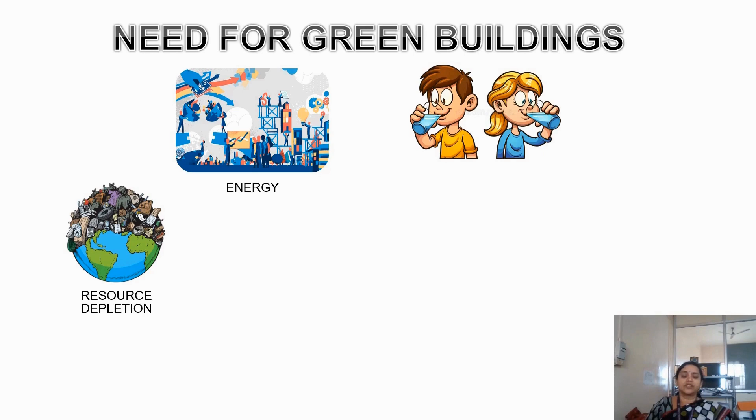Buildings' negative impact on the environment has paved the way for the growth of green buildings or sustainable buildings today. Buildings are responsible for a huge demand for material and resource depletion for construction, and buildings are known to consume a large amount of energy. More than 30 to 40% of energy produced is consumed by buildings around the world, and buildings are responsible for contributing more than 20% of water consumption throughout the world. All of this has led to global climate change.

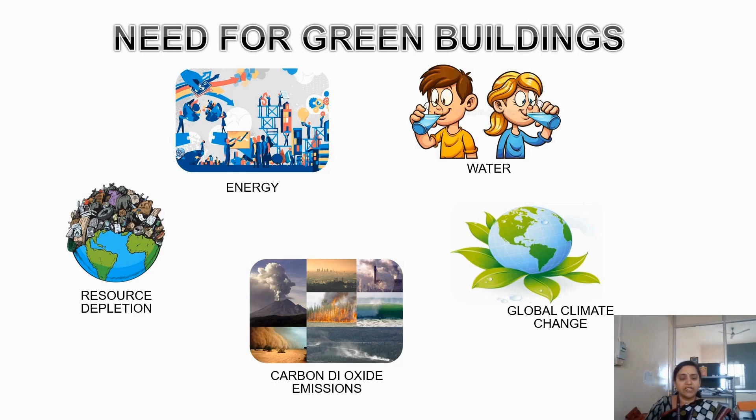So we are now suffering due to the climate crisis, and moreover buildings are responsible for increased carbon dioxide emissions throughout the world. We will have a detailed understanding in this session.

The first major raw material used in building construction is cement. India is the second largest producer of cement in the world, producing more than 210 million tons of cement, which is around 6.3% of global production. Indian cement production is set to increase 4 to 7 times by the year 2050 because of increased demand. But we have to consider that per capita consumption of cement in India is comparatively lower than developed countries, which is around 200 kg per person.

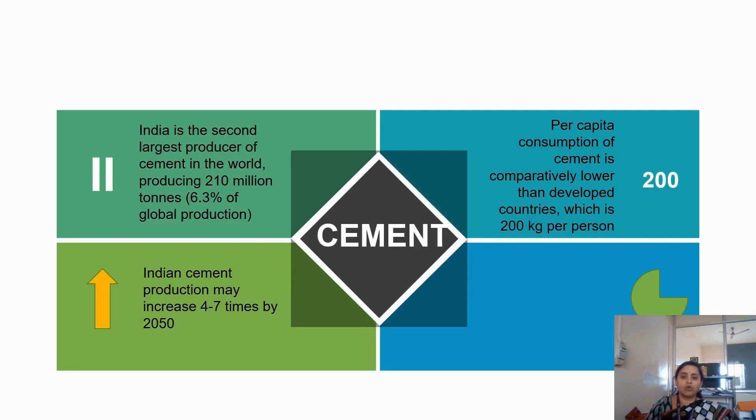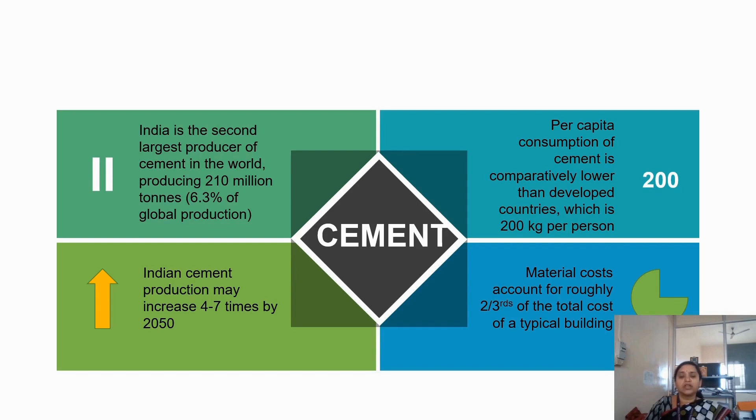Though this is not an excuse for the growing demand and usage of cement. We also should understand that material costs account for roughly two-thirds of the total cost of a typical building, and this is also one of the reasons we have to reduce resource consumption in building construction.

Moreover, cement is also said to cause a huge amount of negative impacts in terms of pollution and other sustainability impacts on the environment.

The next important category of raw material is sand. We all know that since ancient times we have been using river sand, widely used as fine aggregates. Owing to current scarcity, we have now switched over to using manufactured sand in cement mortar as well as in concrete.

Another material highly used in building construction is bricks. Bricks are also used as the base material for roads, as reused or demolished bricks. For the manufacture of bricks, a huge amount of fertile topsoil is being utilized in major parts of the states in India.

Because of recent interventions by the government as well as by professional organizations, and more importantly certain recommendations by the BIS standards, we have now increased the usage of fly ash as a replacement in major raw materials. We know that 12% of total fly ash generated in India is currently used for the production of bricks and tiles. This is an appreciating note, but still we have to understand that owing to the huge demand and usage of raw materials, this percentage is very meager and has to be increased.

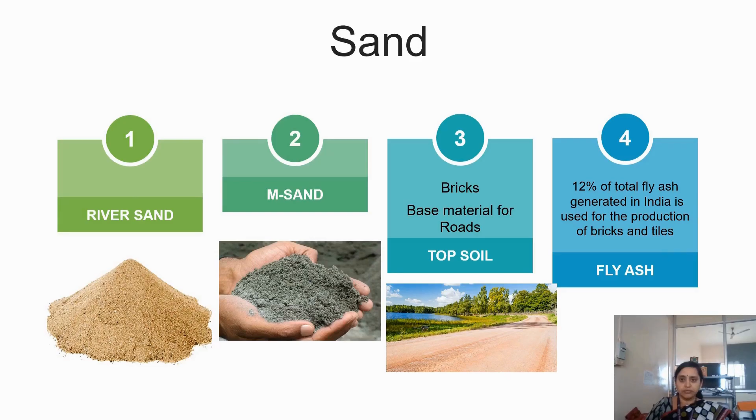The third important material used in large quantity is aggregates. Aggregates have been in use for the manufacture of concrete, in foundations, and so many other applications in the structural built environment. We have used granite, basalt, etc. as aggregates in our building construction.

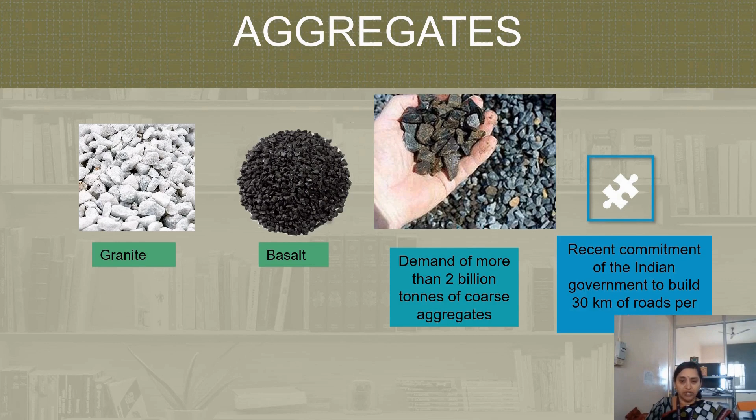Referring to the aggregates, we have a huge demand of more than 2 billion tons of coarse aggregates per year in India. And the recent commitment of the Indian government to build more than 30 kilometers of roads per day adds to the huge demand of aggregates still further.

There is a huge requirement of both fine aggregates and coarse aggregates as well as cement, as per the growth of buildings in India. So we have to check whether all the raw materials are available as per the demand, or else we have to go for a sustainable alternative to search for replacement raw materials.

One more important material to consider is limestone, which is used in the cement manufacturing process. India utilizes about 226 million tons of limestone in cement manufacture as well as in iron and steel, chemical and other industries, out of which the cement industry's share is about 93%. Research reports denote that limestone resources in India will last only for the next 35 to 41 years. So after 40 or 50 years, we won't have the material called limestone.

So we have to really pay attention to this and search for a good replacement for limestone, especially for cement manufacture. One more thing to understand is limestone also causes huge negative impacts in terms of pollution during the process of quarrying. So replacement of limestone will be a very good alternative to satisfy future requirements as well.

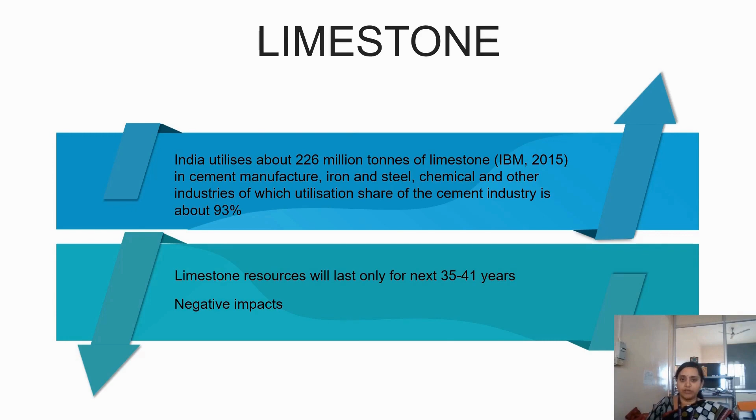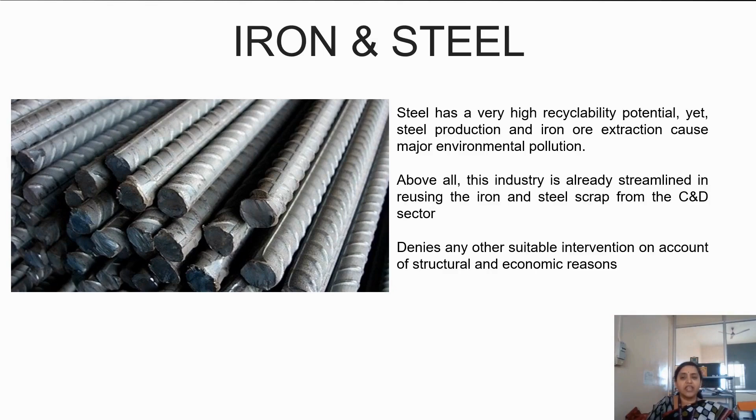We have discussed major materials. One important sector to consider is the iron and steel industry. Steel has very high recyclability potential and has been used extensively in the built environment. But thanks to the Indian economy, with the help of rag pickers or scrap vendors, even minute quantities of steel scrap are recycled back into the industry, so there is no major problem of iron and steel as waste in the Indian economy. Because of this, the iron and steel sector denies any other suitable intervention on account of structural and economic reasons. So as of now, usage of iron and steel is appreciated and not under any intervention in the green building scenario.

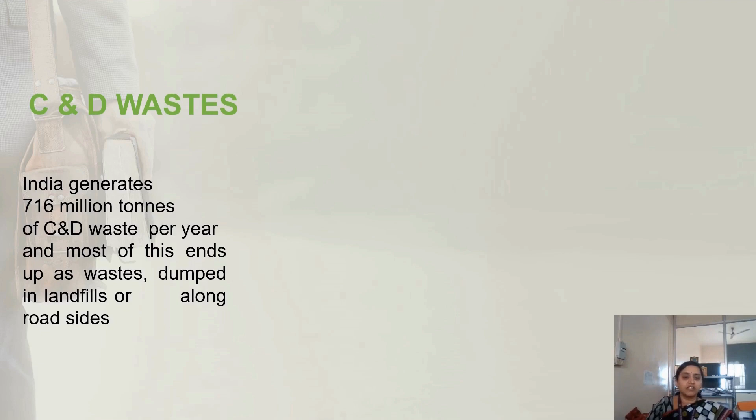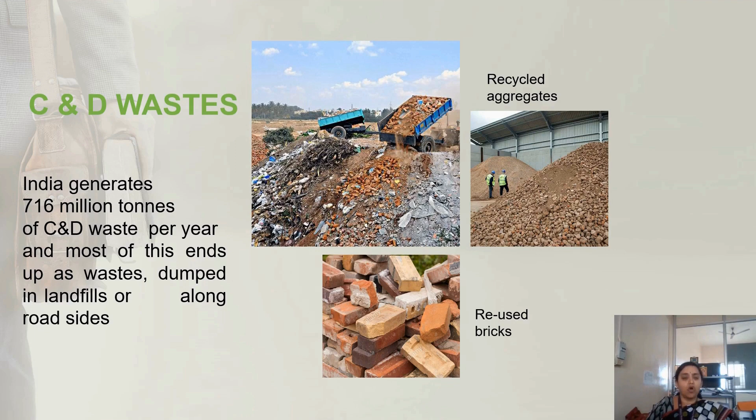The next important category to consider is construction and demolition waste. India generates around 716 million tons of construction and demolition waste per year, and most of this waste ends up simply dumped in landfills or along roadsides. This waste has huge applicability potential as recycled aggregates, and the construction and demolition industry should also take steps to use reused bricks in major construction activities today, so as to minimize the huge amount of waste being simply dumped in landfills. This will also lead to savings in the usage of raw materials.

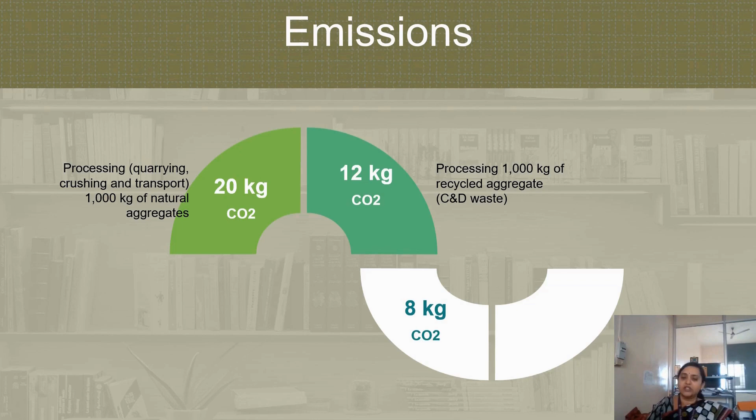There is an interesting fact to understand regarding emissions. Research mentions that processing 1000 kg of natural aggregates - quarrying, crushing and transport - emits around 20 kg of CO2 into the atmosphere, whereas the same processing of 1000 kg of recycled aggregates, produced from construction and demolition waste, produces only 12 kg of carbon dioxide. Comparing these two, we understand that material replacement with 1000 kg of recycled aggregates from construction and demolition waste will prevent emission of 8 kg of carbon dioxide into the atmosphere.

Thus, simple replacement with recycled aggregates rather than natural aggregates can cause savings of around 8 kg of CO2 per 1000 kilograms of aggregates. This will really cause huge savings and improvements in carbon dioxide mitigative measures, and if we employ such activities, we can save around 8 million tons of carbon dioxide per annum compared to the huge usage of materials in the Indian scenario. Also, the aggregate demand in concrete and road laying in India is estimated to be 1.1 billion tons per annum.

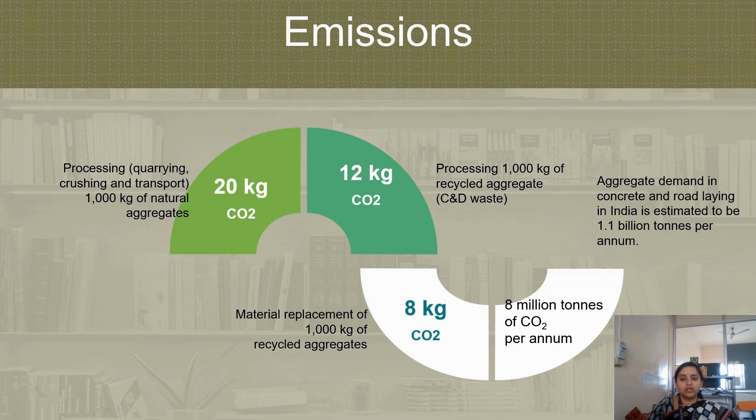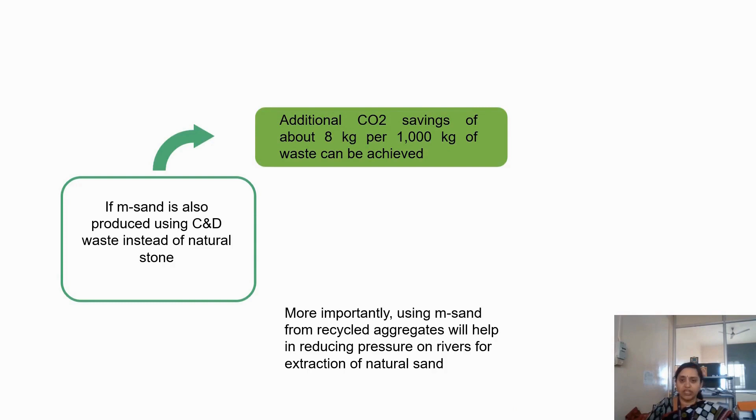So if we are going to replace huge demand with recycled aggregates from construction demolition waste, it will cause a huge impact on the minimization of carbon dioxide emissions to the environment. In addition, if M sand is also produced using construction and demolition waste instead of natural stone, additional carbon dioxide savings of about 8 kg per 1000 kg of waste can be achieved. More importantly, using M sand from recycled aggregates will help reduce pressure on rivers for extraction of natural sand.

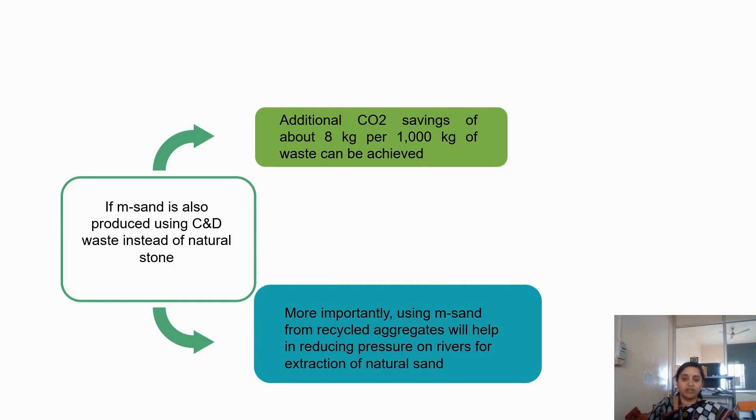We had an understanding about the impacts of material usage in the construction industry. Now we'll understand the impacts in terms of energy conservation.

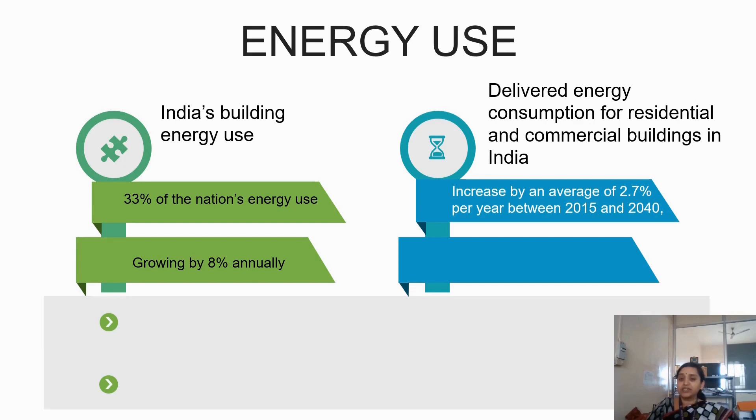Buildings also consume a large amount of energy. Considering India's building energy use, 33% of the nation's energy use corresponds to buildings alone, and this demand is growing by 8% annually, causing a huge requirement of energy consumption. When we speak about delivered energy consumption for residential and commercial buildings in India, this increases by an average of 2.7% per year between 2015 and 2040, and this demand is more than twice the global average. Summing up, building construction and usage demands a large amount of energy compared to all other sectors, and this really needs an intervention measure.

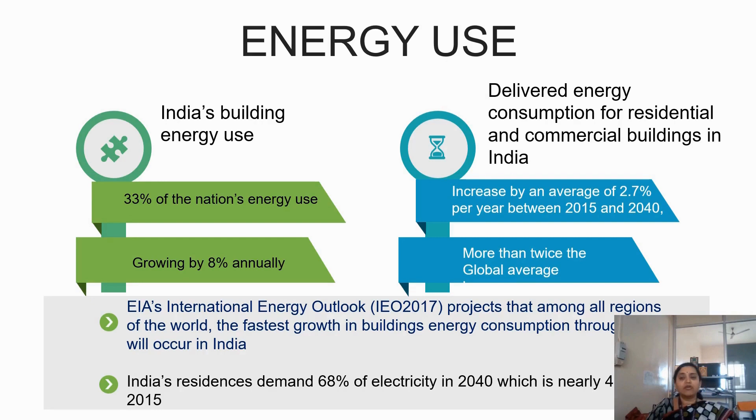EIA's International Energy Outlook also projects that among all the regions of the world, the fastest growth in buildings energy consumption will occur only in India, and India's residences demand more than 68% of electricity in 2040, which is nearly 4 times the average in 2015. Considering this, we have a potential to grow green buildings in such a way that energy consumption should be minimized in India.

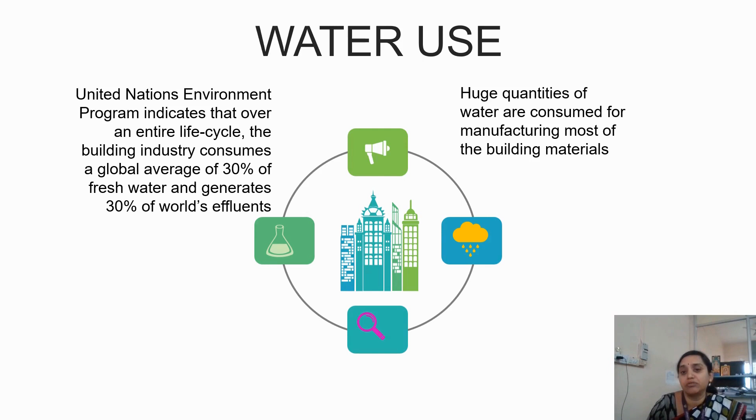Another broad sector is water consumption in buildings. The United Nations Environment Programme indicates that over an entire life cycle, the building industry consumes a global average of 30% of fresh water and generates 30% of the world's effluents. Huge quantities of water are consumed for manufacturing most building materials, adding to the water demand. Building construction is one sector which consumes a substantially high amount of water every year, and the rate of extraction of water far supersedes the rate of replenishment.

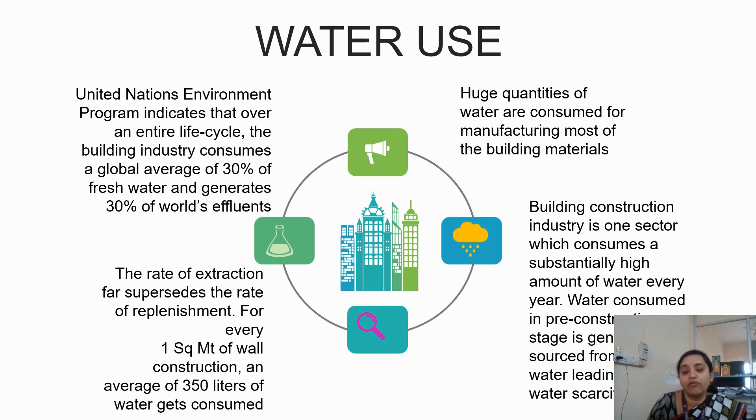For every square meter of wall construction, an average of 350 liters of water gets consumed. Overall, we have a huge consumption of water, more than 20% of the world's water demand, only for building construction.

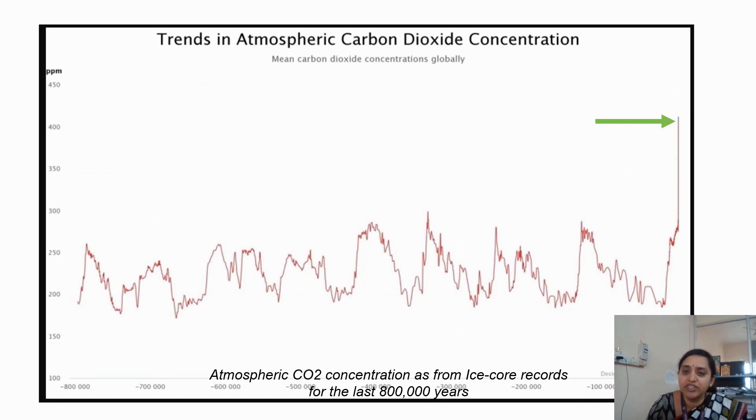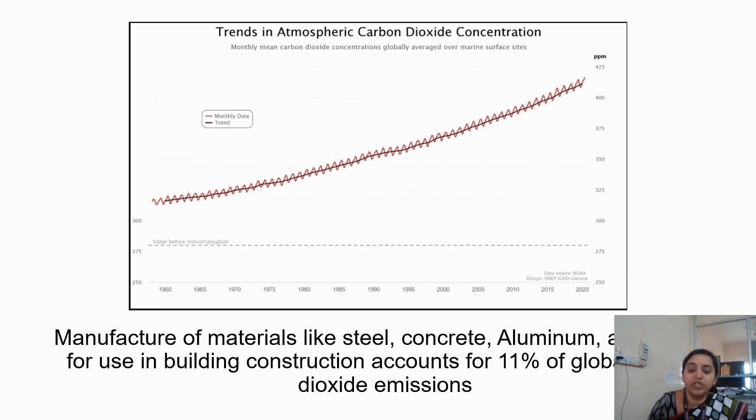When we look at trends in atmospheric carbon dioxide concentration, we observe a graph where the curve peaks high during the very recent years. This data was taken during 2020, and we can observe that the graph has reached almost a maximum carbon dioxide concentration. So we understand that we have to take very essential steps to reduce the global carbon footprint. The manufacture of materials like steel, concrete, aluminum, and most building raw materials accounts for 11% of global carbon dioxide emissions to the world.

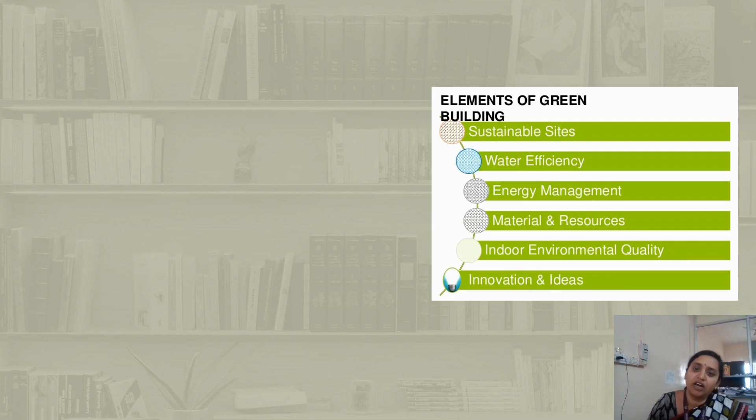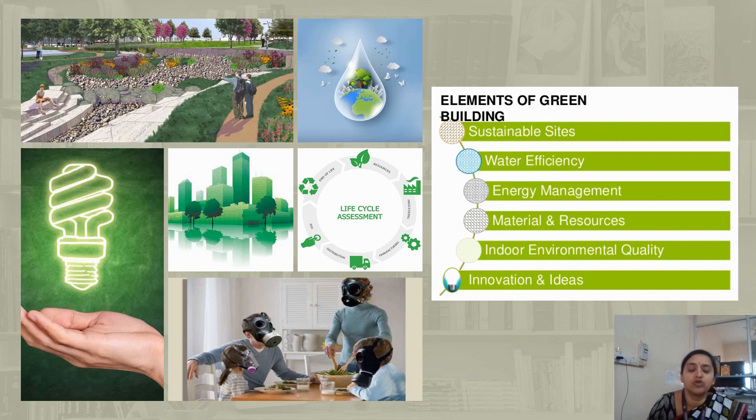Thus we totally understand that building construction, owing to its requirement of raw materials, its energy consumption, and its water consumption, really affects the environment — not only in terms of pollution and usage of raw materials, but also with its huge amount of carbon dioxide emissions. We understand that we should adopt a holistic and sustainable approach to buildings. The overall major domains of green building cover the most important areas like sustainable sites, water efficiency, energy management, materials and resources, indoor environment air quality, and some innovative ideas that could be incorporated to convert the built environment into an eco-friendly and sustainable built environment.

This today's presentation is over. We will continue exploring deep into the concepts of green building in the next presentation. Thank you.